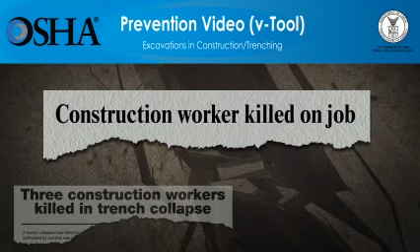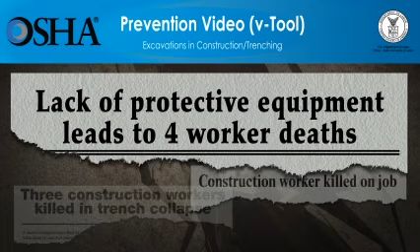The video you're about to see shows how quickly cave-ins lead to workers' deaths. The video will also show what employers must do to assure that the work can be done more safely. Employers have a responsibility to provide a safe workplace and required protective equipment. You'll see that using the right type of protection saves lives.

Please be advised, the scenes you're about to see deal with deaths at construction sites and might be disturbing for some people. All scenes are based on true stories.

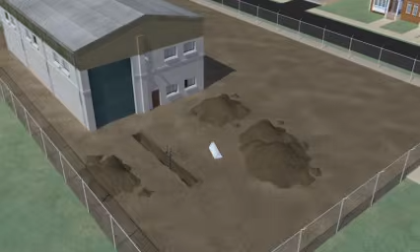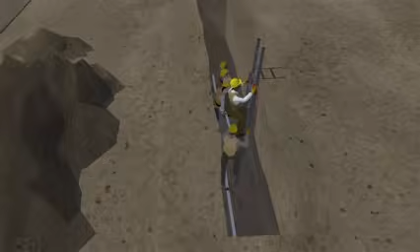5 workers were putting a sewer pipe into the bottom of a trench with a ladder nearby to enter the trench. There was nothing in place to protect the workers inside the trench if the walls collapsed. While the workers were inside the trench, one side began to collapse. 2 workers were able to climb out using the ladder, but the other 3 workers were buried in the soil and unfortunately suffocated to death from the weight of the soil.

Let's look at the events leading up to this tragic incident and see how it could have been prevented. Employers must follow OSHA rules to protect workers in trenches. However, here, the employer did not follow OSHA's rules, which led to these workers losing their lives. Let's go over the main points of OSHA's rules for trenches to see how to keep workers safe.

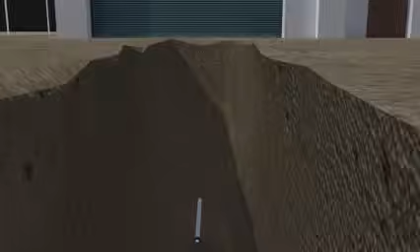All trenches must follow OSHA's rules. 1 cubic yard of soil can weigh as much as a car, nearly 3,000 pounds. So unless the trench is cut entirely into stable rock, protection against cave-ins must be used for all trenches more than 5 feet deep, or for any trench that shows signs of cave-in.

Before workers can do any work in a trench, a competent person must conduct an inspection to identify and remove any potential hazards. A competent person is someone who can recognize hazards in the area and who has authority to take quick actions to eliminate the hazard, which may include temporarily stopping the work. Inspections must be performed at the start of every shift, after a rainstorm, or whenever conditions change.

The competent person must also test the soil in a trench. OSHA requires at least 1 test by looking at the soil and at least 1 test by hand. If a person knows the soil types, they can pick the right protective system to keep workers safe when they're in trenches. OSHA classifies soil in a trench as stable rock, Type A, Type B, or Type C soil.

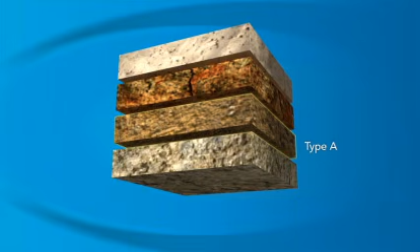Stable rock is the safest soil for a trench. Type A is the next most stable, and then Type B. And finally, Type C soil is the least stable. It's important to remember that trenches can have different types of soil based on depth and climate conditions. The competent person can choose from different protective systems for a trench, based on the types of soil found.

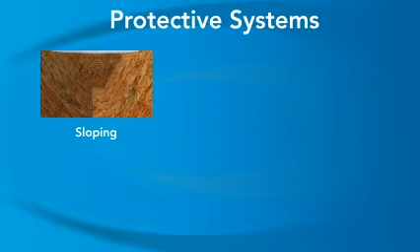For all trenches deeper than 5 feet, or for any trench that shows signs of cave-in, OSHA requires sloping, benching, shoring, or shielding to protect workers from cave-ins. Let's review each of these systems and then see how each one could be applied to the cave-in incident shown earlier. We'll look at sloping first.

Sloping protects workers by cutting back the sides of the trench so the sides slant away from the trench. OSHA's rules identify the degree of slope allowed for each of the different soil types. When trenches are less than 20 feet deep, these are the basic maximum allowable slopes for each soil type. Stable rock can be vertical walls, but cannot be undercut.

For Type A soil, OSHA requires that the walls be sloped 9 inches out for every 1 foot of trench depth. For Type B soil, OSHA requires that the walls be sloped 1 foot out for every 1 foot of trench depth.

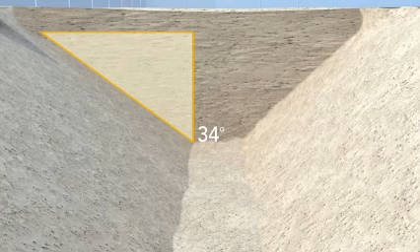For Type C soil, OSHA requires that the walls be sloped 18 inches out for every 1 foot of trench depth. It's important to note that this kind of sloping can only be used for trenches less than 20 feet deep. Any deeper, and the protection must be designed by a registered professional engineer.

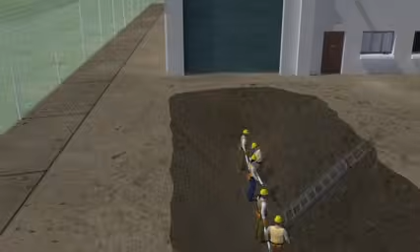So now, let's look at the workers in the original scene who were stuck in the trench as it started to cave in. But this time, the soil has been classified as Type B. The trench has been properly sloped, and the spoil pile is moved away from the edges of the trench. The trench walls are not caving in, and the workers are safe while they work.

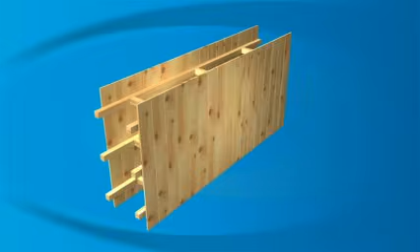Now let's review the shoring type of protective system for trench workers. Shoring uses various support systems to prevent soil and the trench walls from moving. There are different kinds of shoring systems, but timber and aluminum hydraulic are the two basic types. Aluminum hydraulic cylinders are the most common type of shoring, and they are typically installed using spot bracing, plywood, or stacked methods. To install the shoring correctly, you must first determine the soil type.

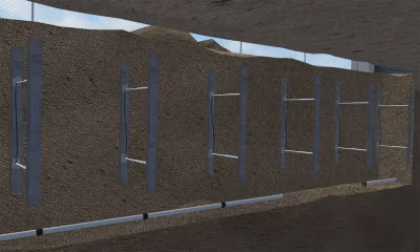The type of soil and depth and width of the trench determine the maximum vertical and horizontal spacing used with the members of the shoring system. If we use our example of a 3-foot wide, 10-foot deep, 40-foot long trench in Type B soil, the shoring system being installed would need to include 12 strong aluminum vertical shores, with 6 on each side of the trench.

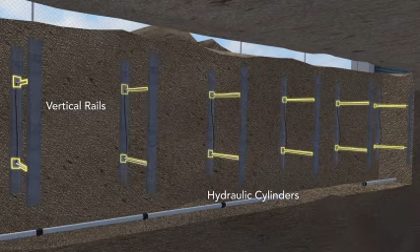These shores, also called rails, will be connected by hydraulic cylinders every 8 feet along the length of the trench. A hand pump pressurizes the hydraulic cylinders until they fit tightly within the rails. Now that the shoring is in place, let's look again at the workers in the trench at the beginning of the video. As before, the workers are laying a sewer pipe into the bottom of a trench. But now the shoring system prevents the trench walls from caving in and keeps the workers safe.

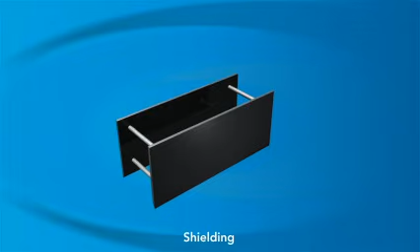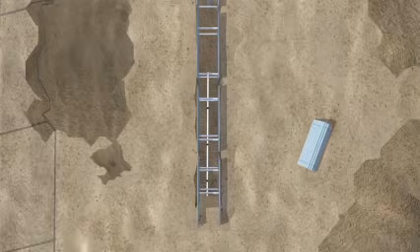Sloping and shoring are ways to protect the sides of the trench so they don't cave in. Now let's talk about shielding, which is a way to protect the workers when they're inside the trench. Shielding involves using trench boxes, also known as trench shields, or other supports to protect workers inside a trench from collapsing soil if a cave-in occurs. The competent person should pick a trench box that is right for the soil type and all other site conditions.

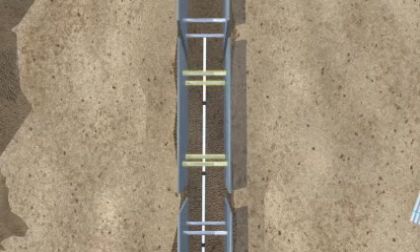A trench box has 2 large plates, which are held apart by 4 horizontal cross members. These plates, or shields, must be between the sides of the trench and the work area. The shields are strong enough to protect workers inside from a soil collapse. The shields can be 2 feet above the bottom of the trench as long as they can support the entire depth of the trench and there's no caving under or behind the shield.

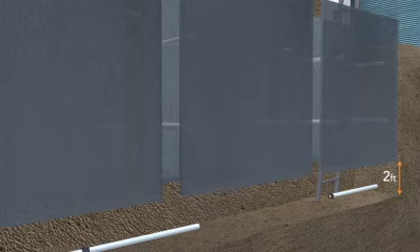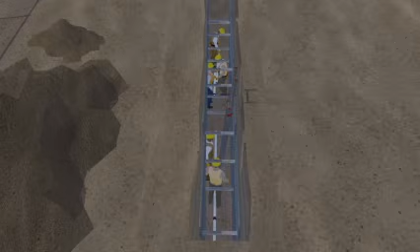The top of the shield should extend at least 18 inches above the level of any materials that could cave into the trench. Trench boxes are typically used in open areas, but they can also be used with the sloping methods discussed earlier. So let's see how a trench box could have saved the workers that we saw at the beginning of the video. For our example, we'll assume that the workers are in a trench with Type C soil and no sloping, but working inside a trench box. This time, as the workers lay the sewer pipe into the bottom of the trench, they are protected from any possible cave-ins.

This example shows the importance of employers following OSHA's excavation standards to ensure that workers are provided with a safe workplace. These types of construction deaths are preventable. The trench cave-in prevention measures shown here save workers' lives. Use these protections on the job. It could be the difference between life and death.